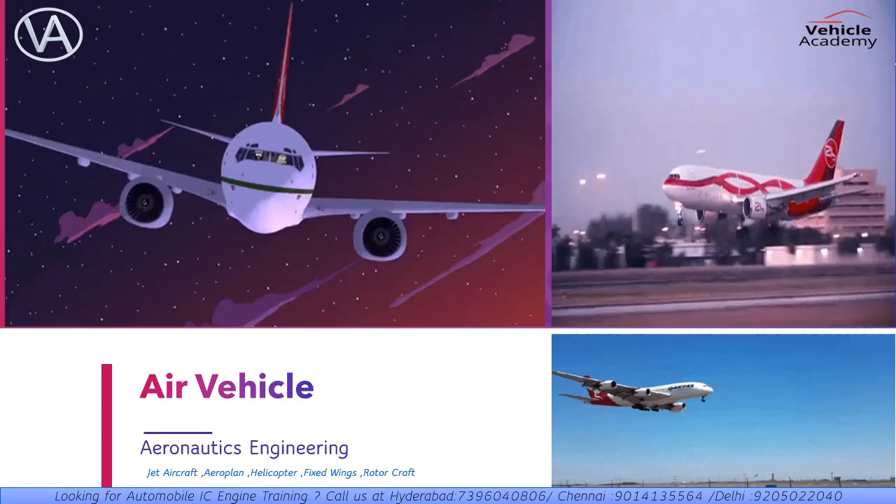The second one is air vehicle. The vehicle which moves in the sky or which flies in the sky is called air vehicle. It comes under aeronautics engineering, the branch of engineering which deals with manufacturing, designing, repairing and making air vehicles. For example, jet aircrafts, aeroplane, helicopter, etc.

The third one is land vehicle, also known as automobile vehicle. The vehicle which moves on road is called land vehicle. The branch of engineering which deals with manufacturing, designing, repairing of this vehicle is called automobile engineering. For example, car, bus, trucks, bikes and all. Please watch this video till the end to understand all the types of vehicle.

Now you can see here types of automobile vehicle. Automobile vehicle is of two types: first is passenger vehicle, second is goods vehicle. Passenger vehicle is of two types: light vehicles and heavy vehicles. Light vehicle is also of so many types like auto cycles, mopeds, scooters, motorcycle, jeep, station wagon, pickups and car. These all come under light vehicle.

In passenger vehicle only, heavy vehicle also comes, like buses and coaches. In buses, single deck buses come, double deck buses come, mini buses come, big buses come. In coaches, deluxe comes, air conditioned comes.

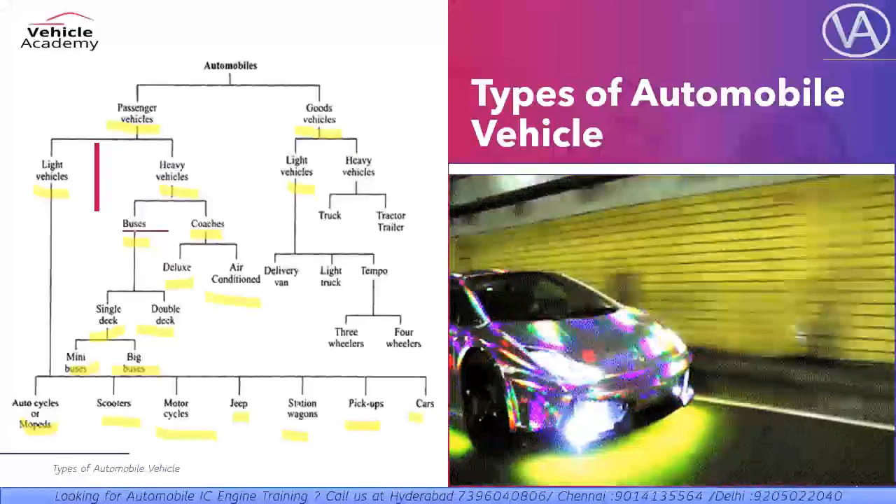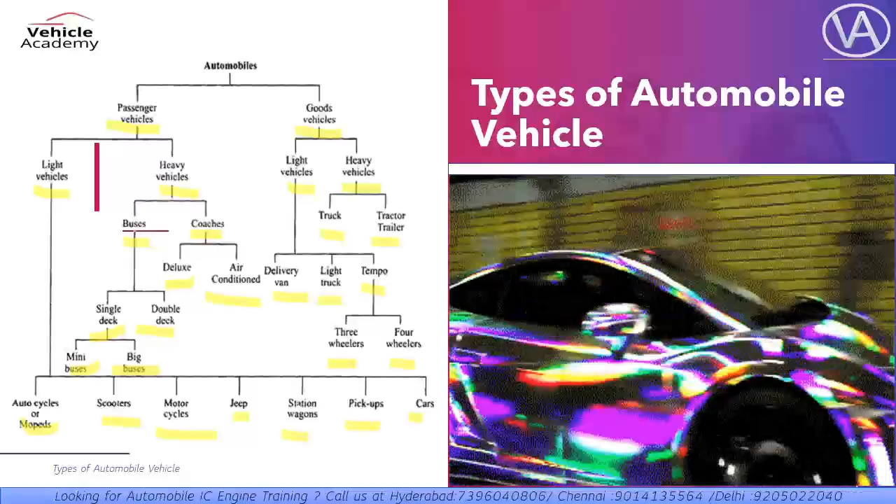Like the same, it's categorized here in goods vehicle also. Light vehicles are also of three types: delivery van, light trucks, and tempo, which is also of two types: three wheeler tempo, four wheeler tempo. In heavy vehicles, you can see heavy vehicles are also of two types: truck, tractors, trailers, and all this comes under heavy vehicles. Types of automobile car.

In the types of automobile car, it will be on different basis. The first one is on the basis of body style. There are a lot of types of car based on body style, like sedan, coupe, sports car, station wagon, hatchback, convertible car, pickup truck, minivan and sport utility vehicle. These are the vehicles which are completely based on the body style. Now we'll go through each vehicle one by one.

The first one is sedan. A sedan has four doors and a traditional trunk. Vehicles in many categories are available in sedan, and there are many ranges, starting from small like Nissan Versa, to medium like Honda Civic, to full size like Toyota Avalon.

The next one is coupe car. Coupe car basically has two doors and also has a trunk and a solid roof. This would include cars like Ford Mustang, Audi A5, Mercedes Benz and all.

The third one is sports car. These are the sportiest, hottest, coolest looking coupe and convertible, low to the ground, chic and often expensive. They generally are two-seaters but sometimes have a small rear seat as well. Cars like the Porsche 911, Mazda Miata, Ferrari 488 GTB, Aston Martin are examples of sports car.

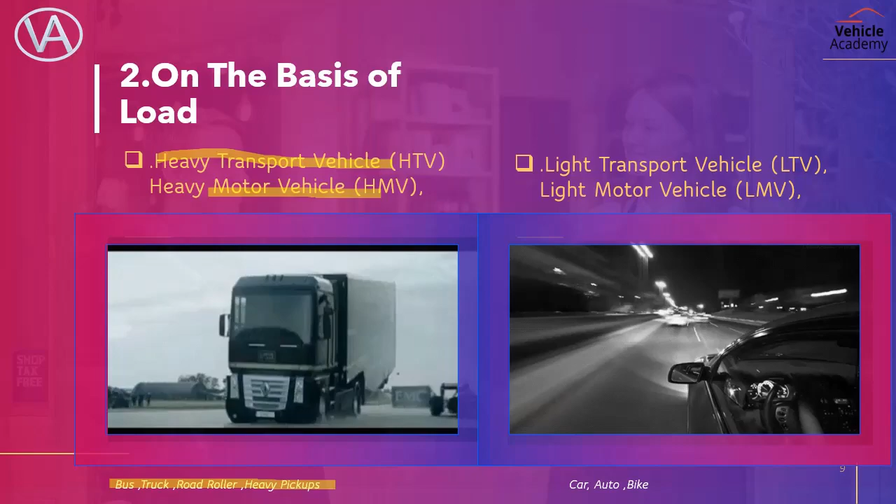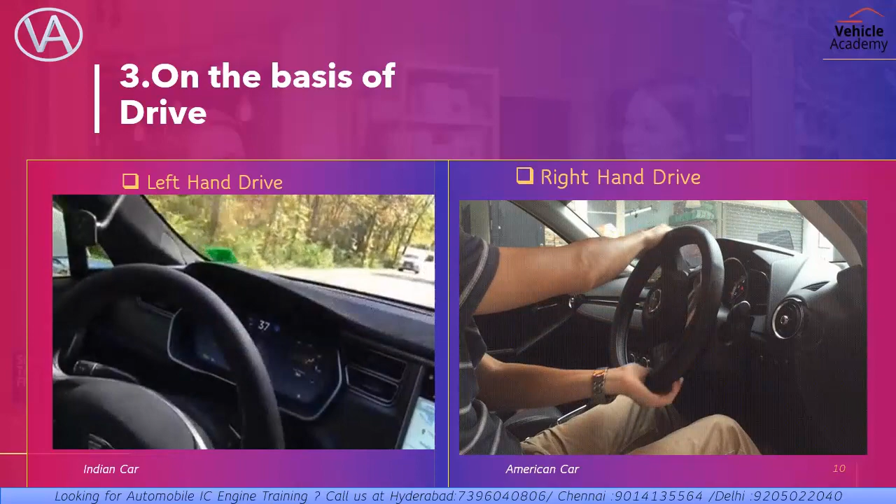Third one is on the basis of drive. There are two types of automobile vehicle on the basis of drive. First one is left hand drive, which is Indian car, and second one is right hand drive, that is American car.

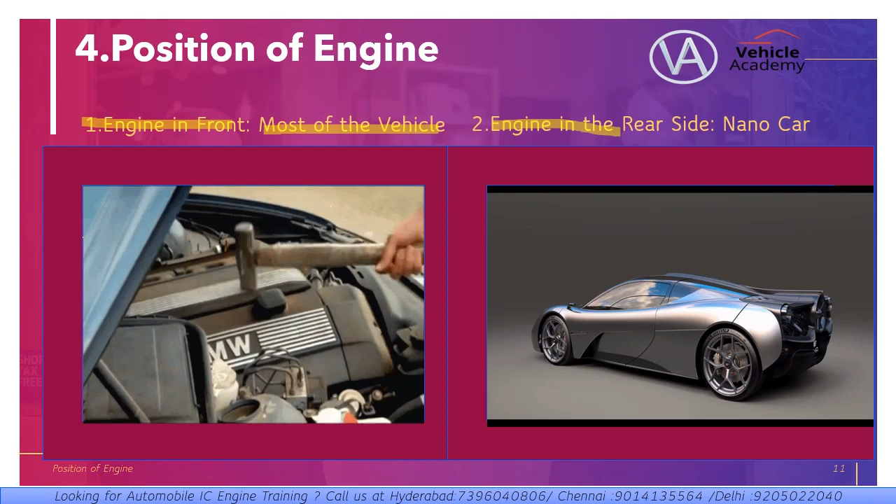The fourth one is according to the position of engine. It is also two types. First one is engine in front, and second one is engine in the rear. In most vehicles the engine comes in front. In some vehicles it comes in the rear side, for example the Nano car, in Nano it comes in rear side.

Next one is on the basis of fuel used. So on the basis of fuel, we have petrol vehicle, diesel vehicle, electric vehicle, steam vehicle, and gas vehicle. We do have examples here also according to the vehicles. Petrol vehicle, for example, motorcycles, scooter. Diesel vehicle, we have truck, buses, etc.

For electric vehicle, we'll be using battery electricity for driving the vehicle. Next one is your steam vehicle, where the engine uses steam. In gas vehicle, we'll be using LPG and CNG. So on the basis of fuel used, there are 5 types of vehicle.

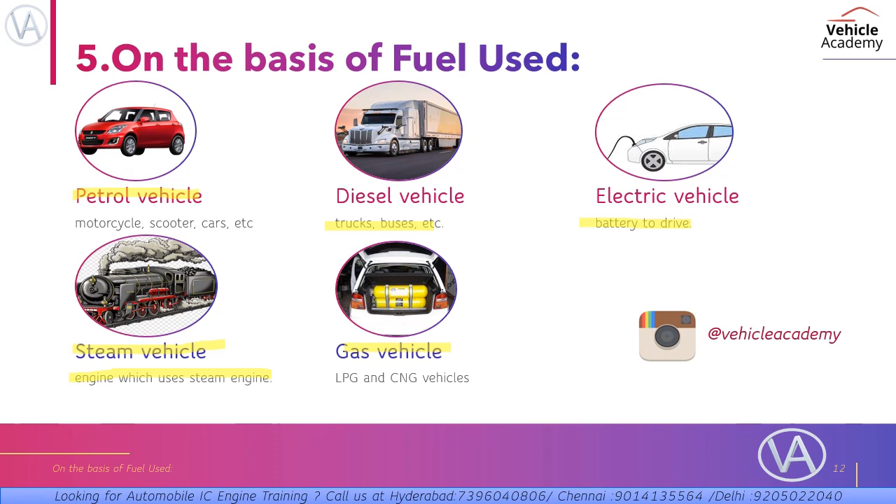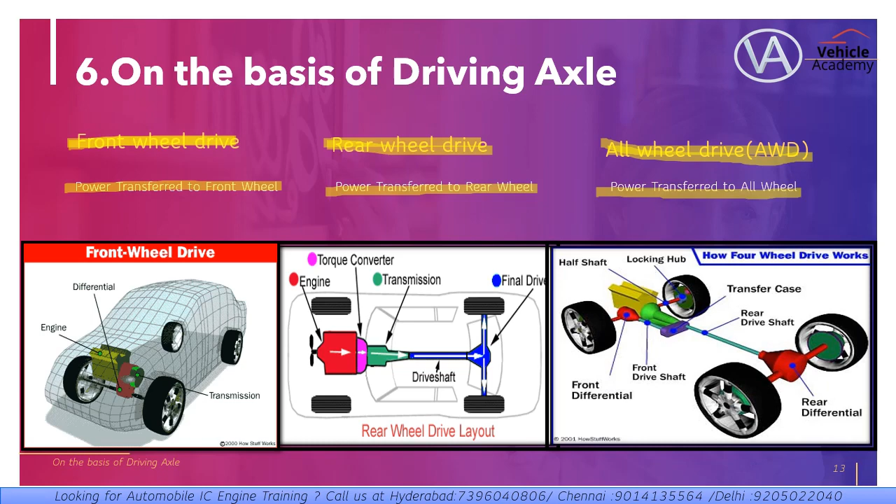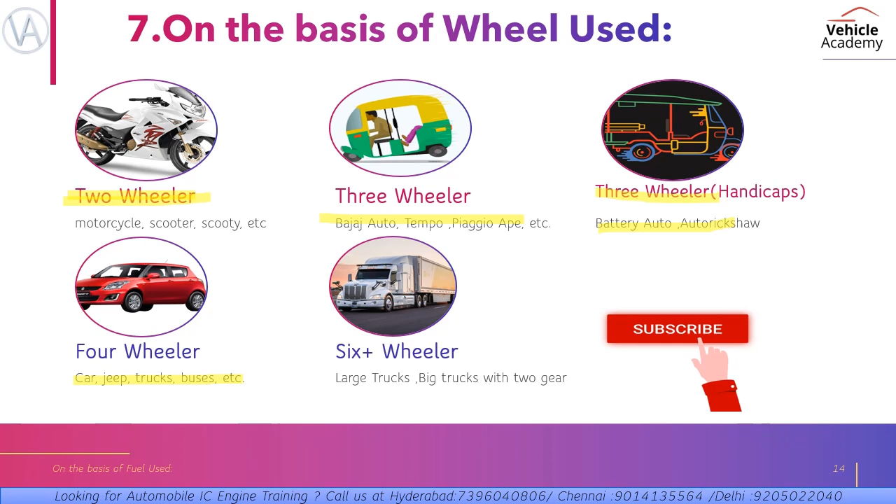Next one is on the basis of wheel used: two wheeler, three wheeler, four wheeler, six wheeler, and six wheeler plus. In two wheelers we have motorcycle, scooter. In three wheeler we have Bajaj Auto, Tempo and all, including battery auto rickshaw. In four wheeler we have car, jeep, trucks, buses, etc. In six wheelers we have large trucks, big trucks with 2 gears.

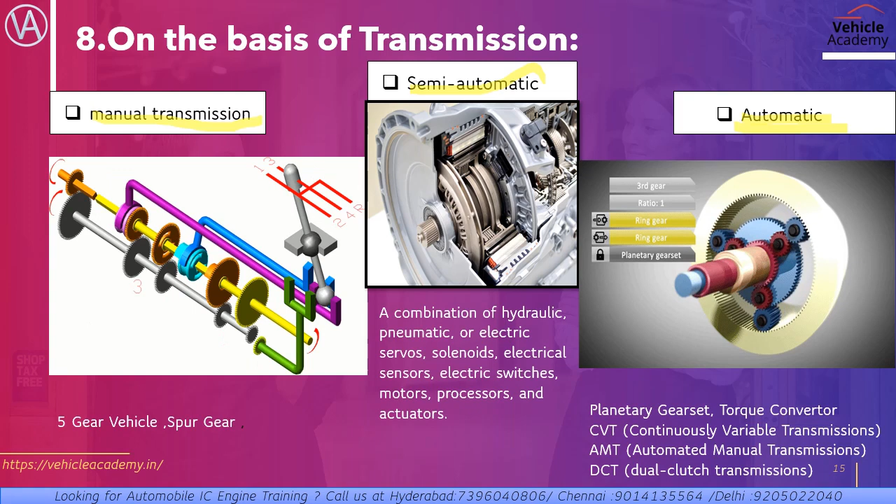The third one is automatic or fully automatic, where we are using torque converter, planetary gears, CVT models. These come under automatic transmission system, where we are not using manual gear to change the gear. This is all about types of vehicle.